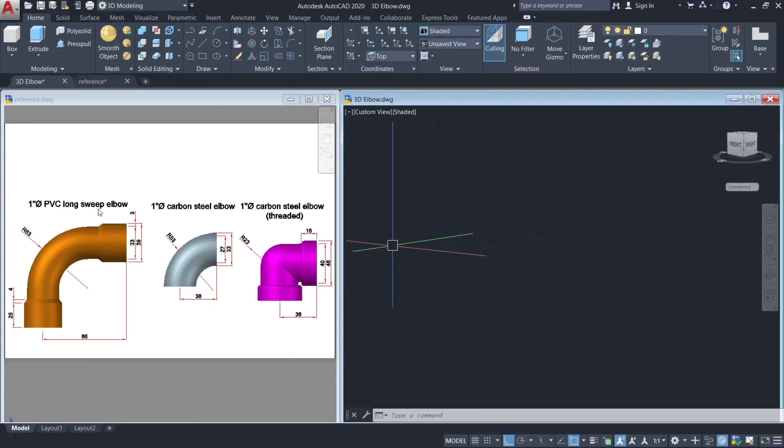Hi, today what we're going to do is these three types of elbow. We have the PVC long sweep elbow, carbon steel, and carbon steel threaded elbow. First, we will make this one, the PVC long sweep elbow.

Change the view to top view. Make a circle with a diameter of 39 units, then another circle with a diameter of 33 units. Okay, then rotate, and then copy this one by 25 units. Okay, and then copy this one also by 25 units, and then another by 4 units.

Okay, remove this one, and then copy. Go to front view first, and then copy this one by 86 units, and then rotate from the center point. Go to front view, move this by 86 units. We have to check the dimension from center to center. This must be 86 and this must be 86 also.

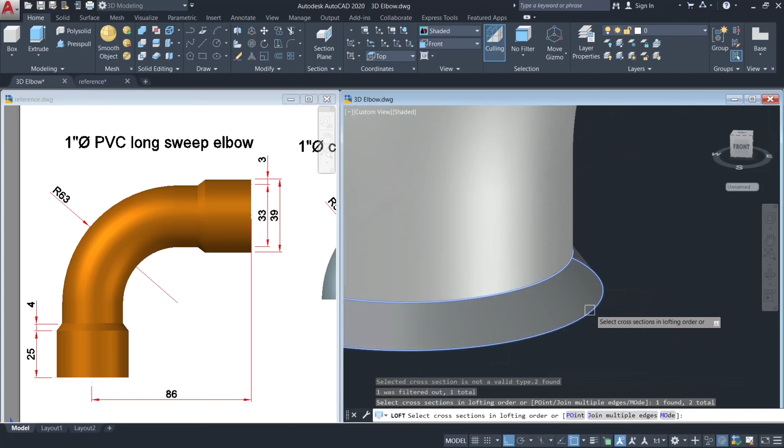Okay, so the next command is the loft. Type loft, click this small circle and then the big circle. Same with this, and then presspull, this circle until here, also with this one.

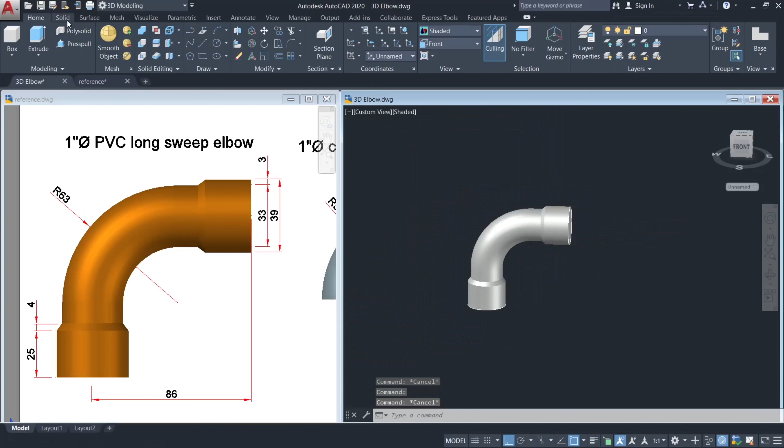Okay, so the next command is the union command. Click this union and then select all, enter. This is now one solid object, and then go to solid, shell, select the object, and then select this surface area, and then this surface area, enter, and then the offset distance, that is the thickness of our pipe, that is 3 millimeters. Enter, enter, enter. This one, this is the 3 millimeters thickness.

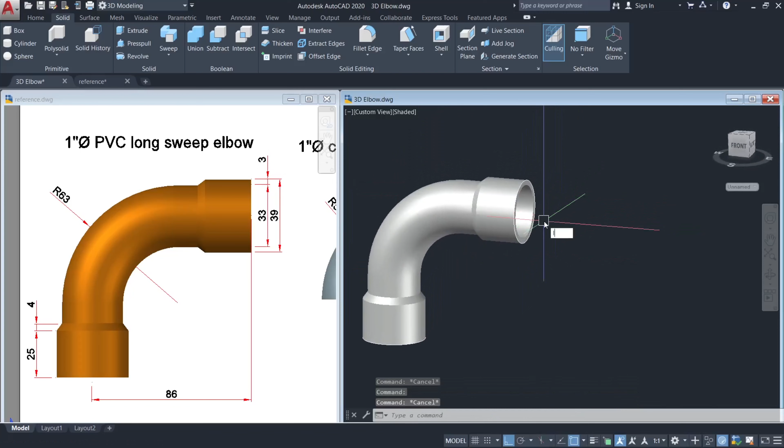Okay, this is the PVC, and then make line here. Then we will do now this one, the carbon steel elbow.

Okay, home, right plane, make circle with a diameter of 33 units, then another circle with a diameter of 27 units. Copy this, go down by 38 units, rotate, move by 38 units, this one. Go to front view to check the center to center distance. From here to here, 38.

This one's 38 also. Okay, and then make line, right plane, make line from this quadrant, 5 units, then another line, top plane, 5 units also, and then we will make a fillet with the radius of 53 units. F for fillet, radius 53, enter, and then click the 2 lines, this one, and then join these 3 lines, J for join.

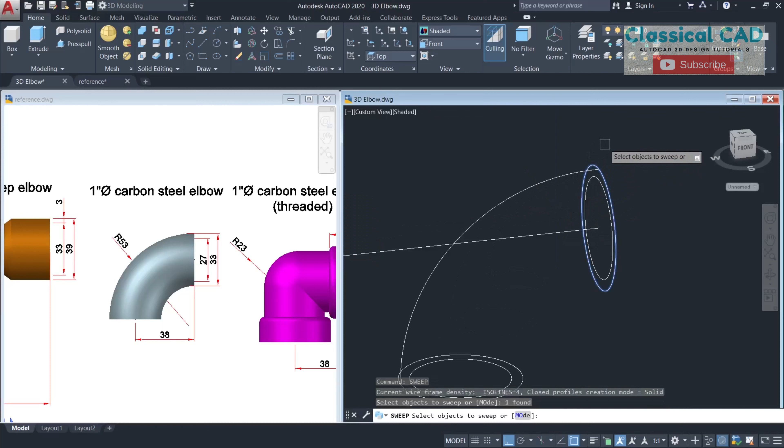Okay, and then use the sweep command, copy first this one, same location, use the sweep command, click this circle, enter, and then this circle. Okay, and then go to solid, shell, select the object, and then click this area, and click this area, enter, offset distance of 3 units, that's the thickness of our pipe.

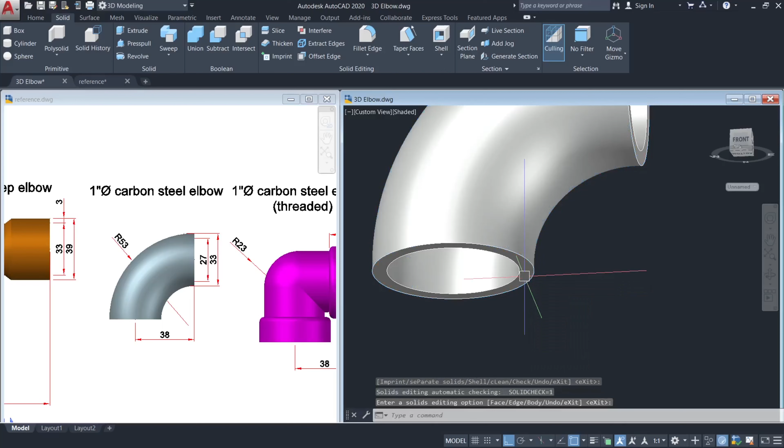Okay, now we have to do the elbow with threaded. As you can see, this has a thread, as you can see here, this has a thread inside.

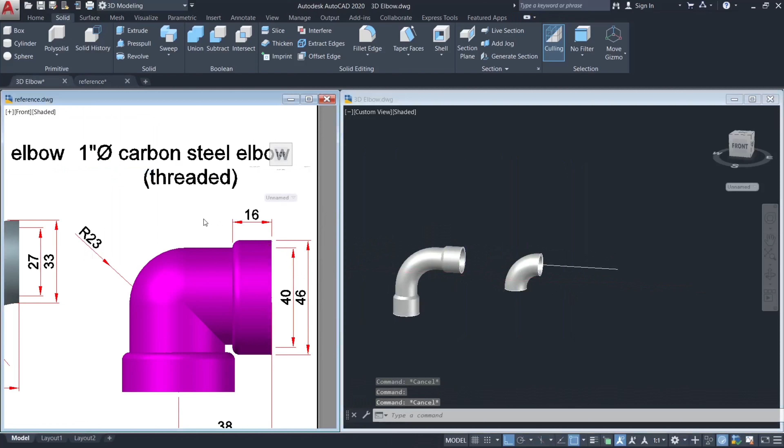Okay, so we will make this one. First we have to make a circle, right plane, circle with a diameter of 46 units, and another circle with a diameter of 40 units.

Then copy this by 16 units, this one, and then copy by 38 units, and then rotate from this midpoint.

Go to front view, move this by 38 units, measure the distance from center to center. This is 46, this is 46, so move this by 8 units.

Move this by 8 units also. Okay, so this is now 38, 38, same with this one.

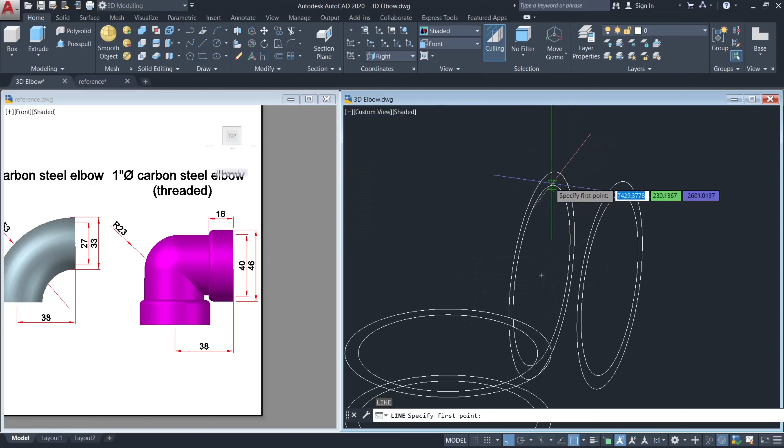Same procedure, right plane, and then make a line from this, 5 units only, and then top plane, make a line, 5 units also.

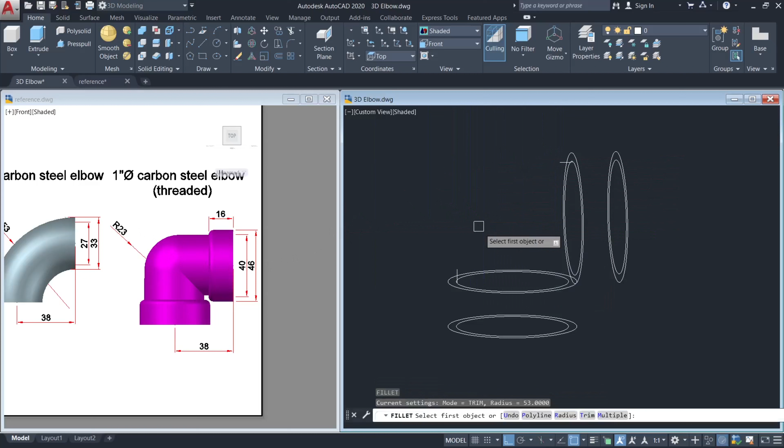Okay, and then sweep, and then make a fillet with the radius of 23 units. F for fillet, radius of 23 units, select the 2 lines, and then sweep command, click this circle, enter, click this arc.

Go to front view, measure the distance from here, center to center, this is 19. So we will move this one by 19 units, and this one also by 19 units.

Let's click this solid, shell, click this object, and then click this area, and this area also, enter, offset distance of 5 units.

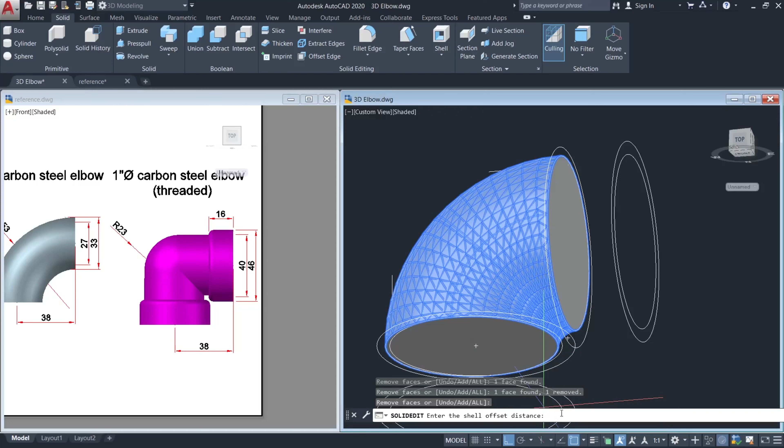Okay, because this is threaded, and then press pull, from here to here. Same with this.

And then press pull this circle until this center point.

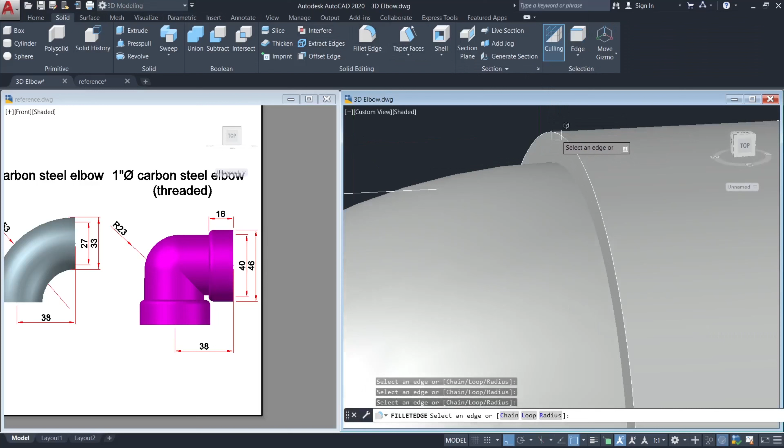Okay, and then now solid fillet edge, click this corner, erase first the 2D circle, fillet edge, click this, radius of 2 units, make it 2, same with this.

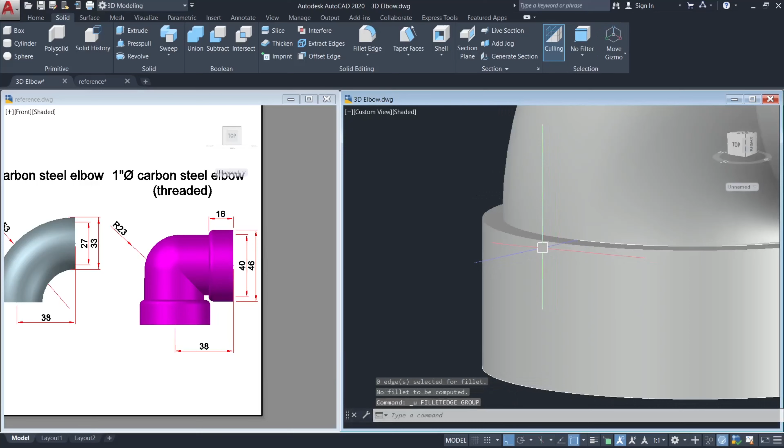Fillet edge, click this, radius 2 units.

Okay, for the helix, for the thread, just copy this one first. And then copy again by 20 units.

Change the plane first to right plane, then type helix, click this one, center, and then the base radius is this one, click this again, and until here.

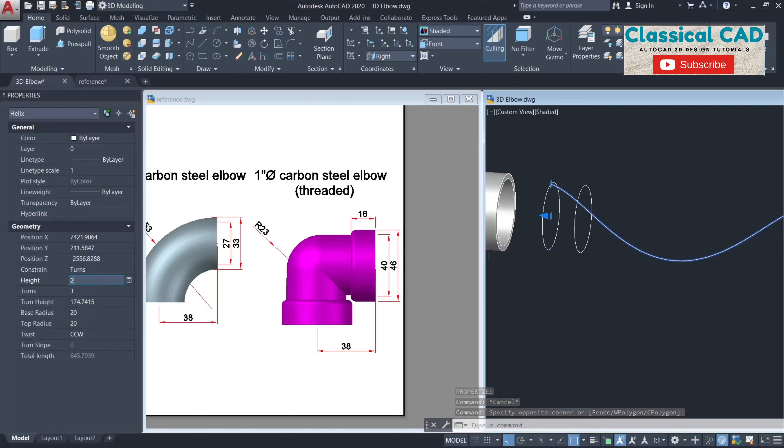Okay, let's change the property of this helix. Go to properties, select this helix, the height will be 20, the number of turns will be 8. Okay, that's fine, close the property.

Okay, so for this one, type polygon, number of side is 3. Click this one, inscribe in a circle. Radius of the circle will be 1.5. And then rotate.

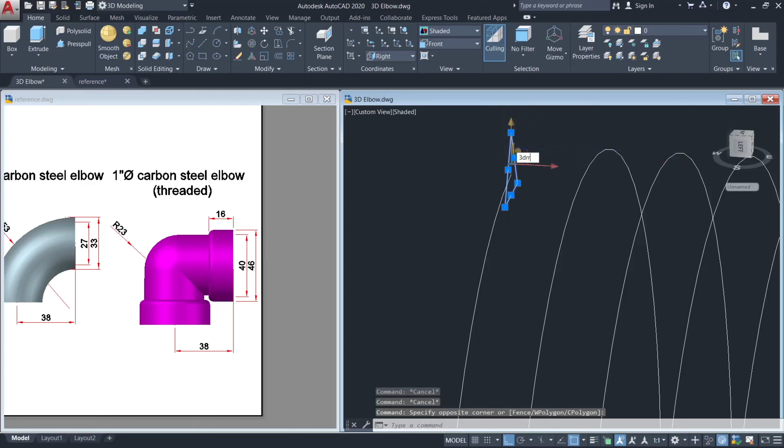Move this midpoint until this endpoint. Okay, use the sweep command. Click this triangle, enter, and then click this alignment. Click no, and then select the path, the helix, this one.

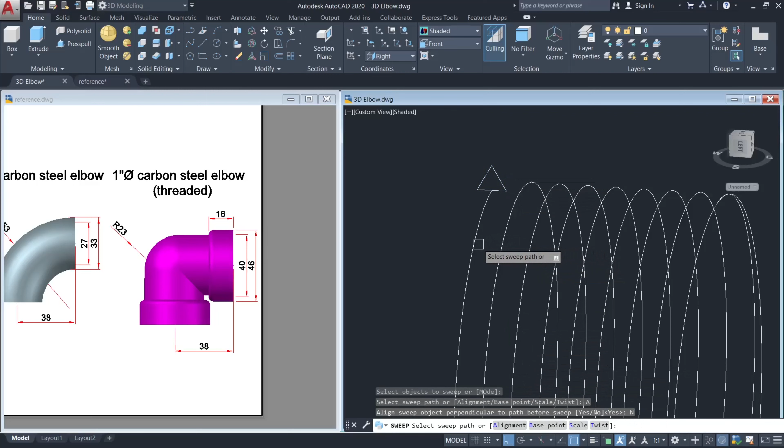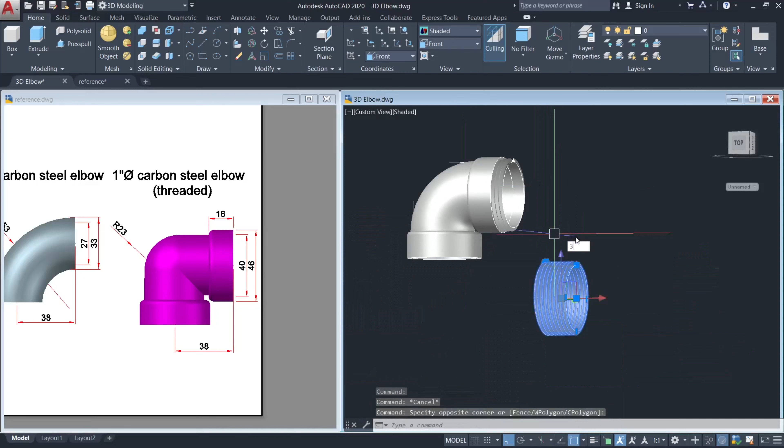Okay, go to front view, and then copy this one, then move this somewhere here, and then rotate this, and then move also from here to this, move somewhere here.

And then use the subtract command, SU, enter, select this object, enter, and then select the thread. Same with this, SU to subtract, click this object, enter, and then the thread, enter.

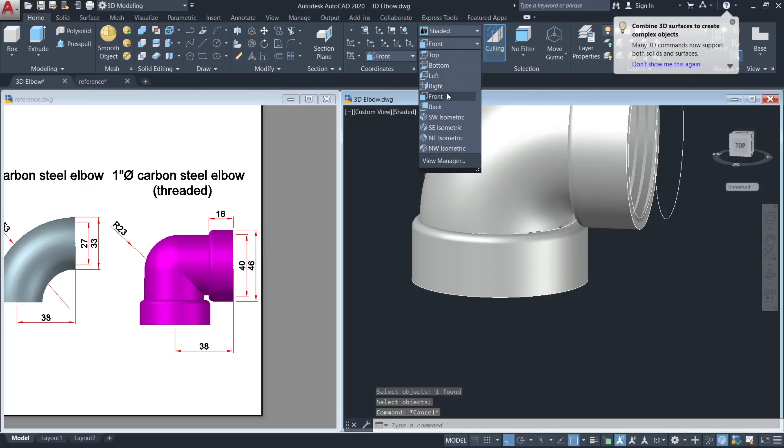Front view, and then for the X-ray, you see there is a thread inside. There is a thread inside for this one.

Okay, so let's remove the excess lines. Select similar, and then delete. Make a union for this.

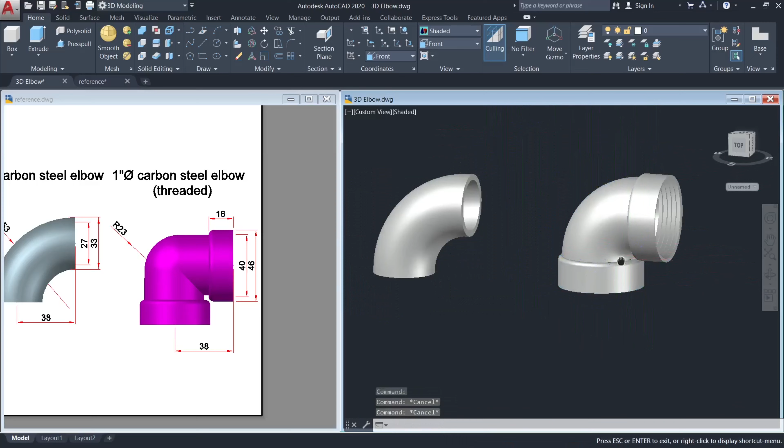Okay, so this is now our product. To make it more presentable, go to material browser, and let's use this one, anodized blue-gray, for this.

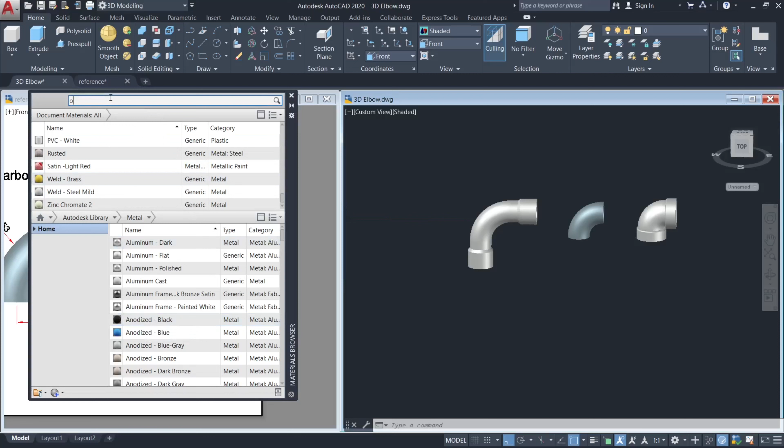And then the orange for the PVC, type orange, this one, and for this one, for the other one, let's use this color magenta, or any color. You can use any color for this.

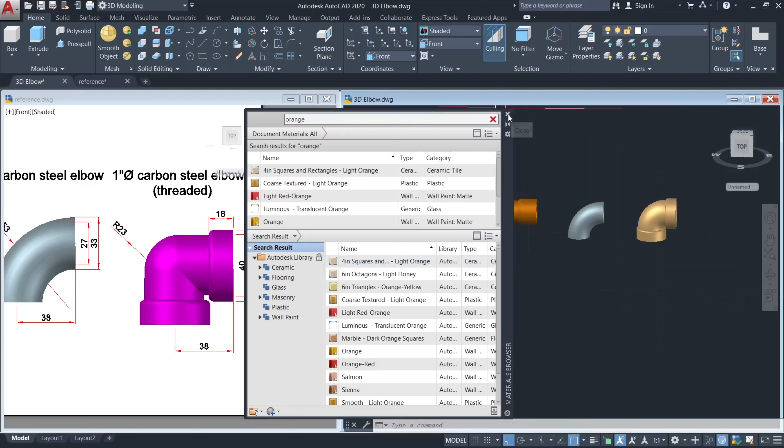Okay, so this is now our product final design for the PVC long sweep, carbon steel welded elbow, and then this is the carbon steel threaded elbow.